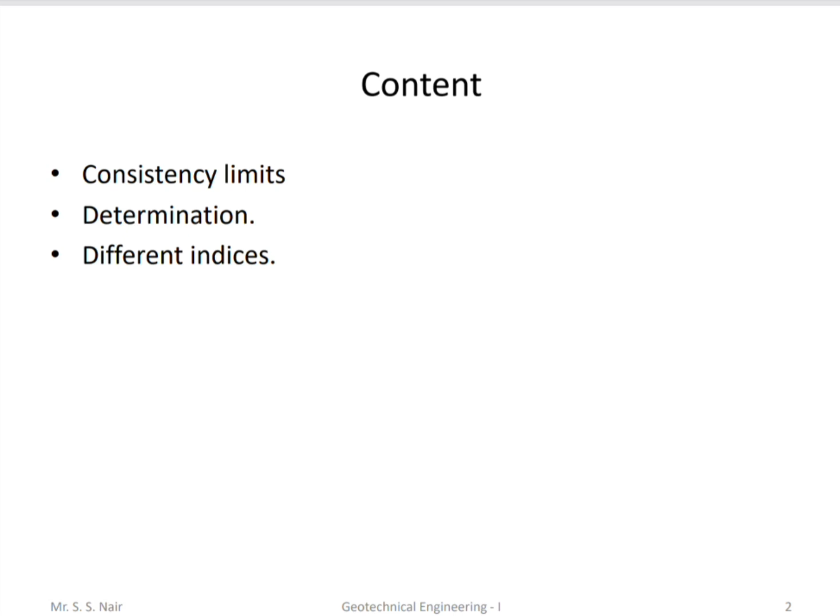Geotechnical Engineering Part 1, Soil Consistency. Today we'll be discussing consistency limit determination and different indices.

Consistency is a term used to describe the degree of firmness of soil in a qualitative manner, using descriptions such as soft, medium, firm, stiff or hard. Generally, this degree of firmness in soil is a measure of the moisture content in the soil. It is the relative ease with which a soil can be deformed. The property of consistency is associated only with fine-grained soil.

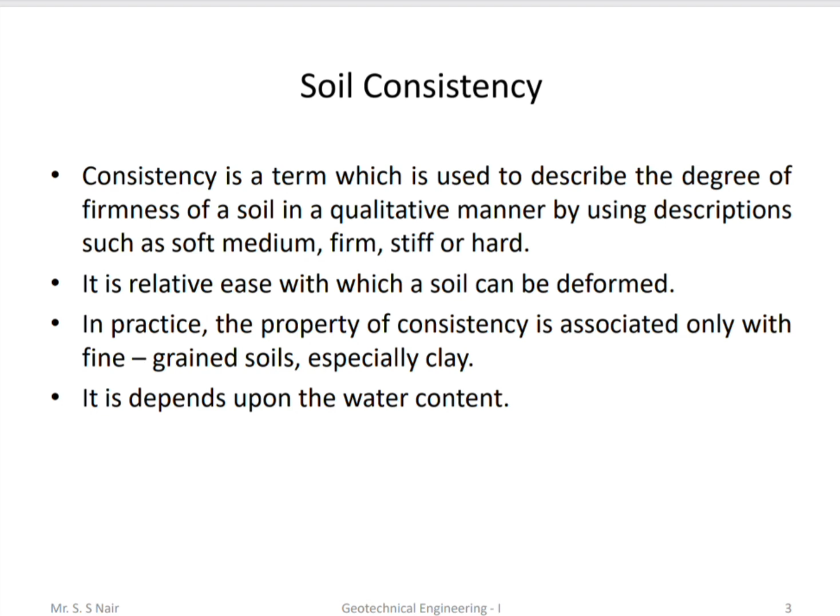Soil consistency directly depends upon moisture content, and this degree of firmness depends upon water content. As shown in the graph, while increasing the water content, the soil transitions from solid state to semi-solid state, then semi-solid to plastic state, and plastic state to liquid state. This water content also denotes the consistency limits.

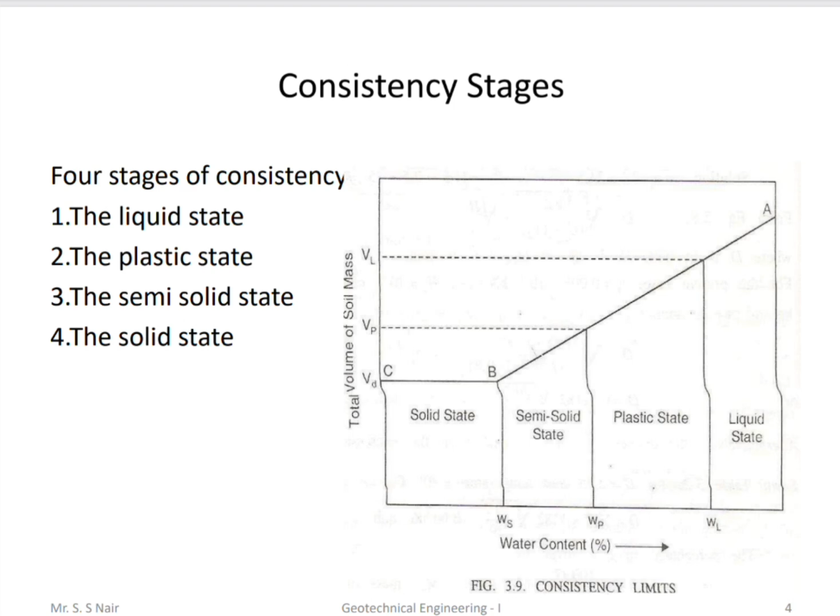Let us understand the three stages: liquid stage, plastic stage, and shrinkage stage. When fine particles are mixed thoroughly with a large quantity of water, the resulting suspension is in a liquid state with no resistance to flow. In this stage, no shear strength will be available.

The second is the plastic stage. The water content of the suspension is gradually reduced to keep the consistency of the sample uniform. A stage comes when it just starts offering resistance to flow - the soil resists the flow of the amount of water added. This is the plastic stage, where a small amount of shear strength will be available.

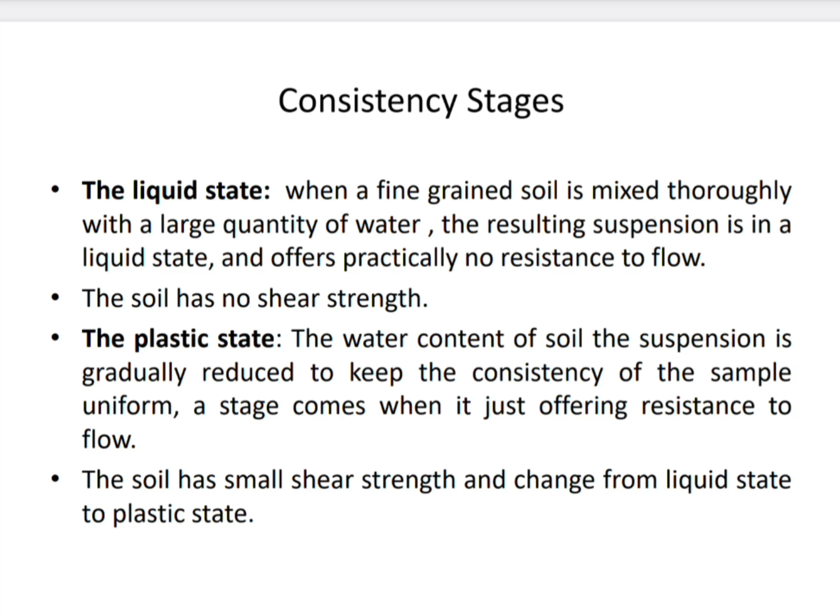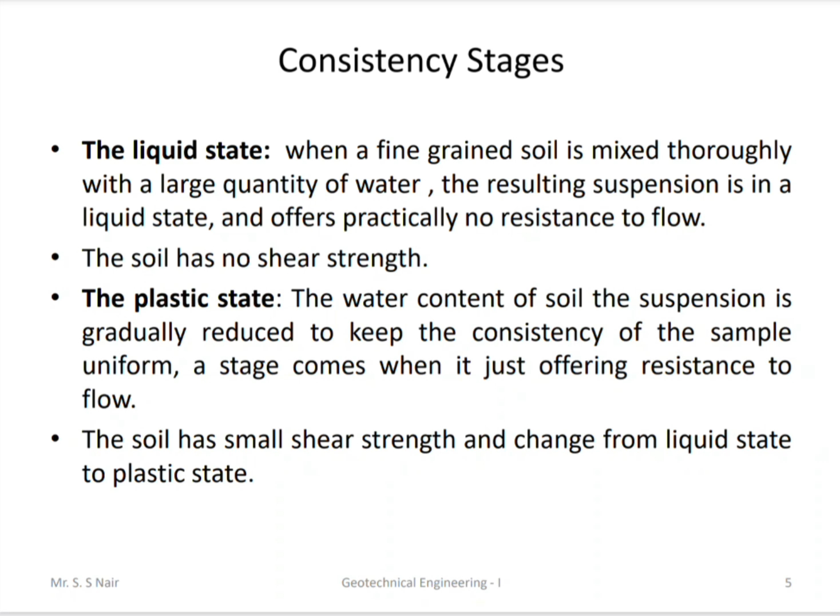The third one is the shrinkage stage, where a lesser amount of water is added. In this stage, a small amount of shear strength will be available.

Now let us talk about the Atterberg limits. The first is liquid limit: the water content in percentage at the point of transition from plastic to liquid stage. This transition from plastic to liquid stage is said to be the liquid limit, where soil behaves as a liquid material.

In plastic limit, it is the percentage water content at the point of transition from semi-solid to plastic stage, where the soil behaves as a plastic material. Now in shrinkage limit, it is the water content in percentage at the point of transition from solid to semi-solid - the moisture content at which no further volume change occurs with further reduction in moisture content.

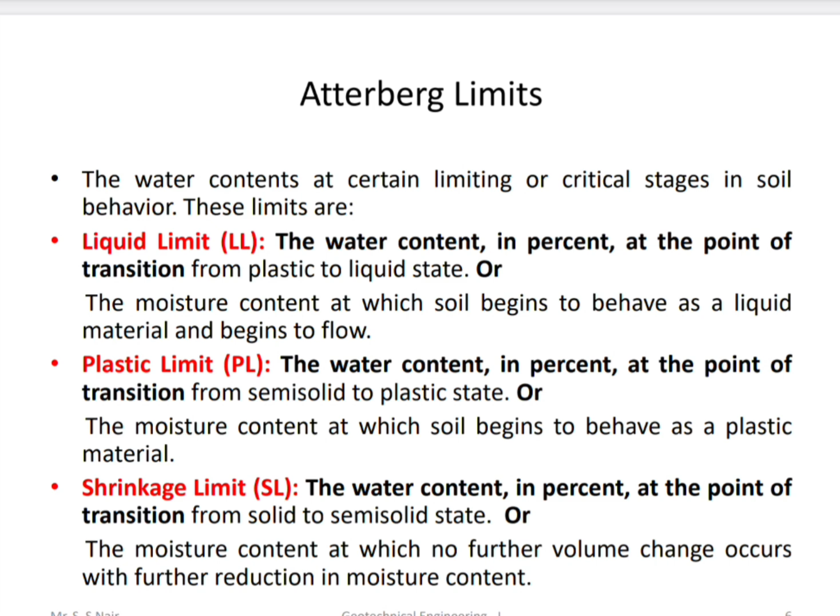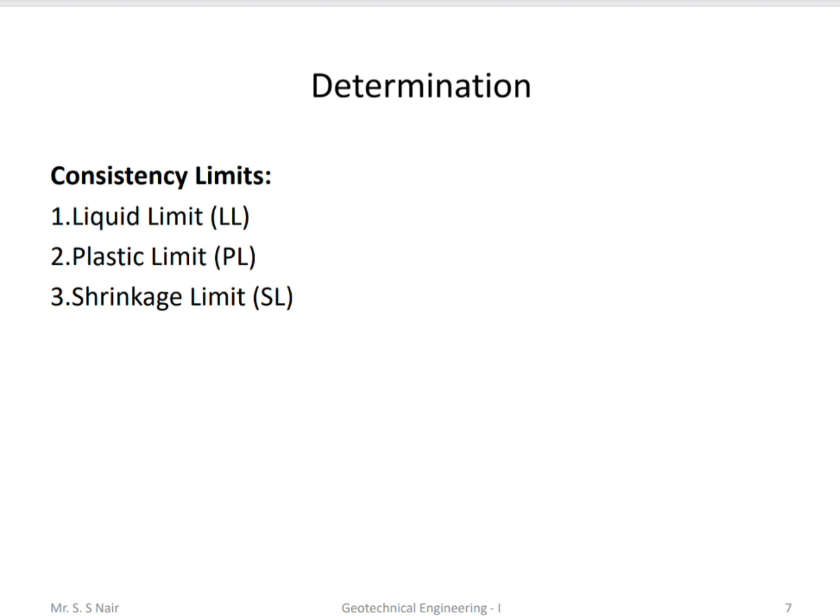So how do we determine the liquid limit, plastic limit, and shrinkage limit? Let us discuss the liquid limit first. What are the needs of the liquid limit? Generally, liquid limit is significant to know the stress history and general properties of soil as it relates to construction. From the results of liquid limit, the compression index may be estimated, which helps in settlement analysis.

If the natural moisture content of the soil is close to the liquid limit, the soil can be considered soft. If the moisture content is less than the liquid limit, the soil is brittle and stiffer. So more water content means more liquid limit, more soft stage. Less liquid limit means the soil may be brittle or stiffer, and lesser water content may indicate a hardened state.

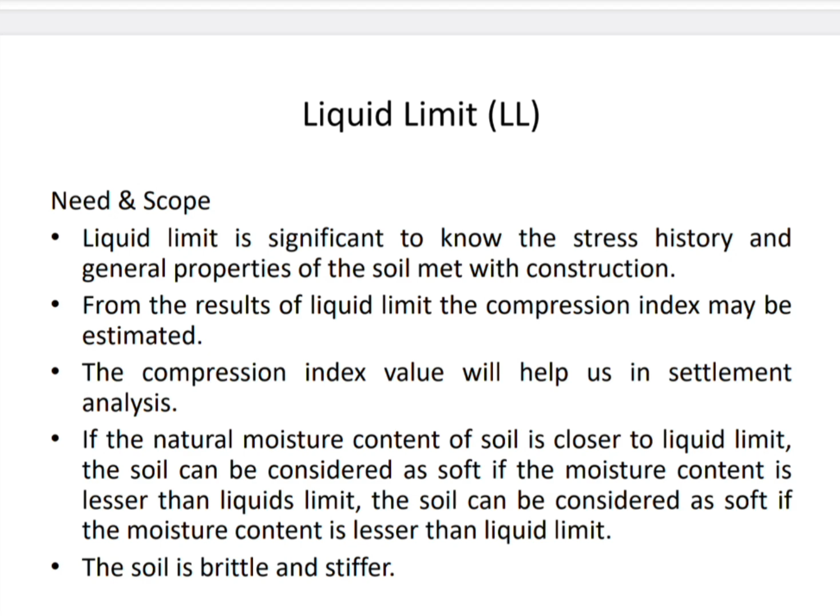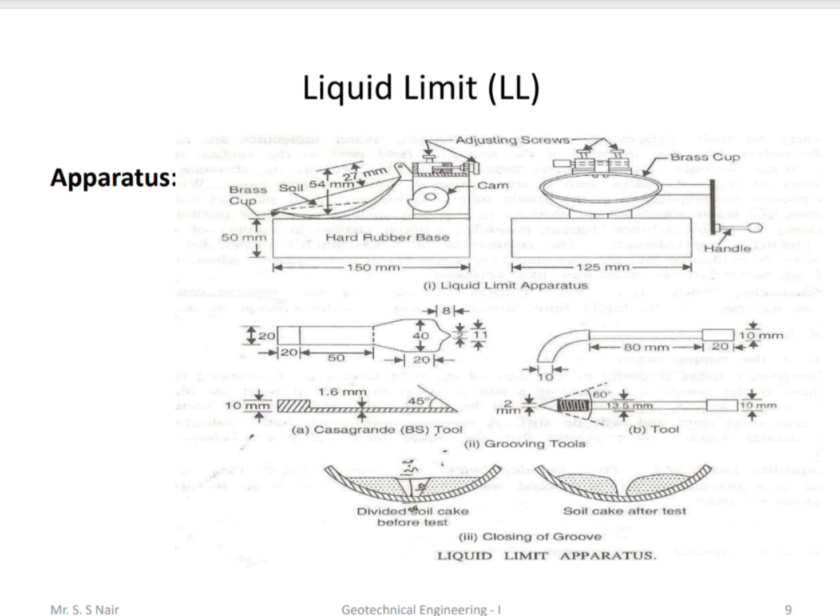Casagrande apparatus is used to determine the liquid limit. Here you can see a cup is placed on the base, with handles to give the number of blows to the cup, and a spatula to cut the sample in the cup, used to determine the liquid limit.

150 grams of dry soil is taken and sieved through the 40 number sieve. Add 20% water. Then the Casagrande apparatus is placed, and the sample is placed on it, cutting a groove of 2 mm at the base.

Now the number of blows is counted by running the device, until the groove in the soil closes to a distance of 12.7 mm. Take the sample and find the moisture content. This test is repeated 3 times - we need the moisture content and number of blows.

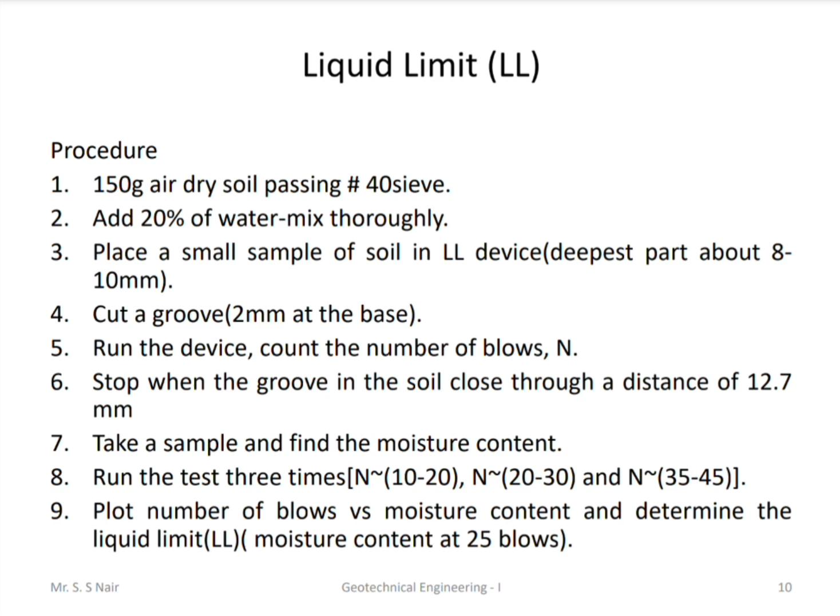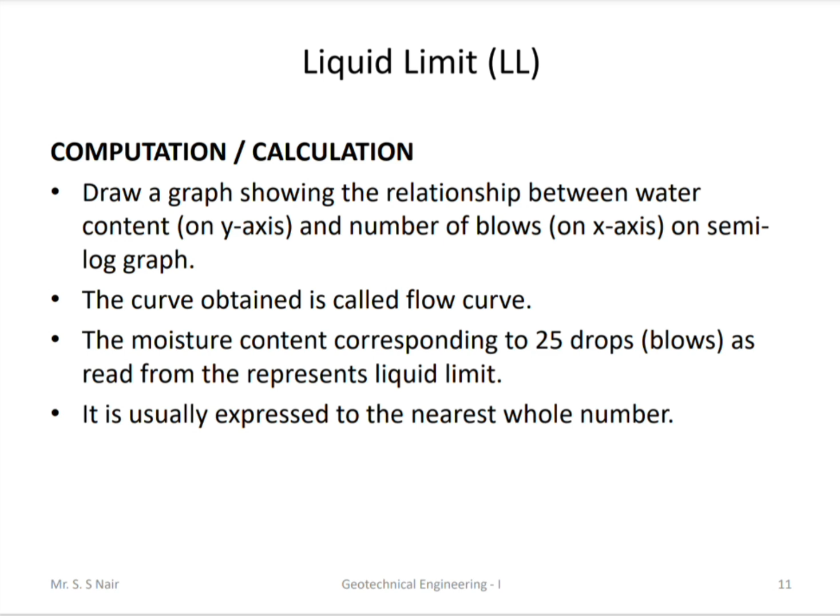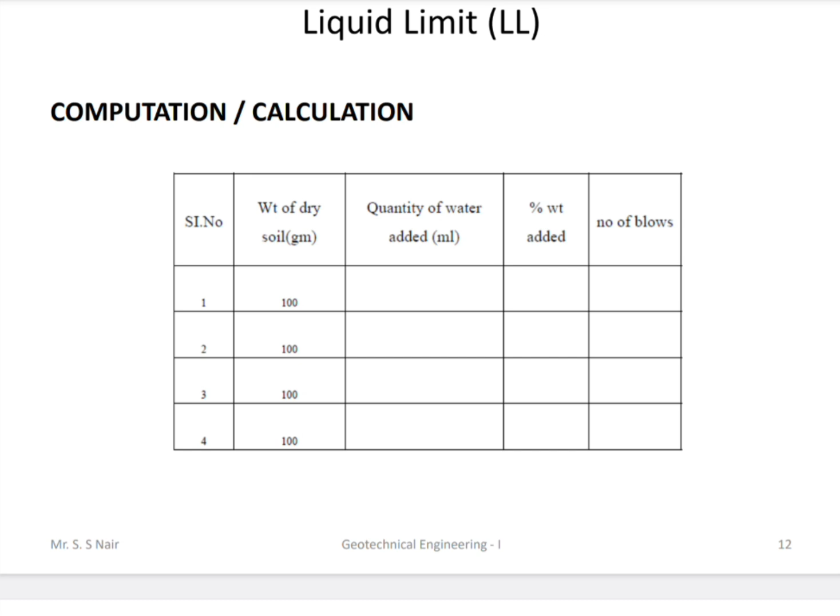Now for 25 blows, determine the moisture content - this moisture content gives you the liquid limit. A graph between water content and number of blows determines the liquid limit; the curve obtained is the flow curve, and the water content at 25 blows is noted. This will be the liquid limit. Here you can see the calculation of quantity of water and number of blows - the flow curve for 25 blows gives the liquid limit.

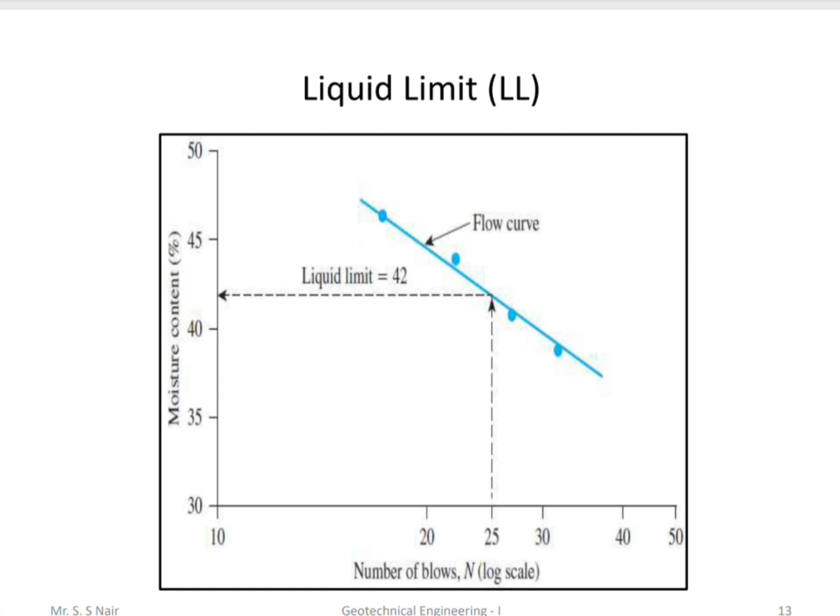Now for the plastic limit test - generally to measure plasticity, soil is used to make bricks, tiles, and soil cement blocks. So we need to determine the plastic limit.

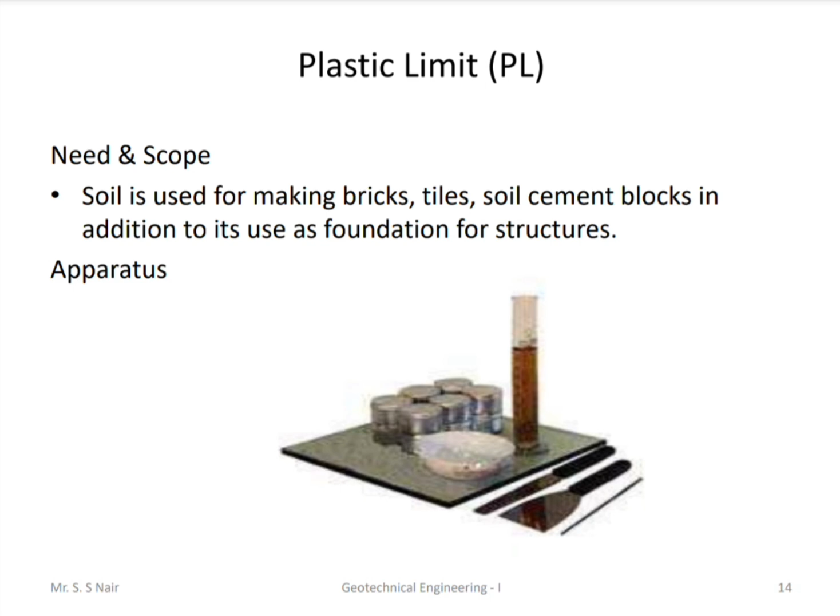Here also, 20 grams of soil is taken and sieved through the 40 number sieve. Add water and mix thoroughly. Prepare several ellipse-shaped soil masses by squeezing the soil with your hand. Put the soil in a rolling device, and roll the soil until the thread reaches 3.2 mm. Continue rolling until the thread crumbles into several pieces, then determine the moisture content.

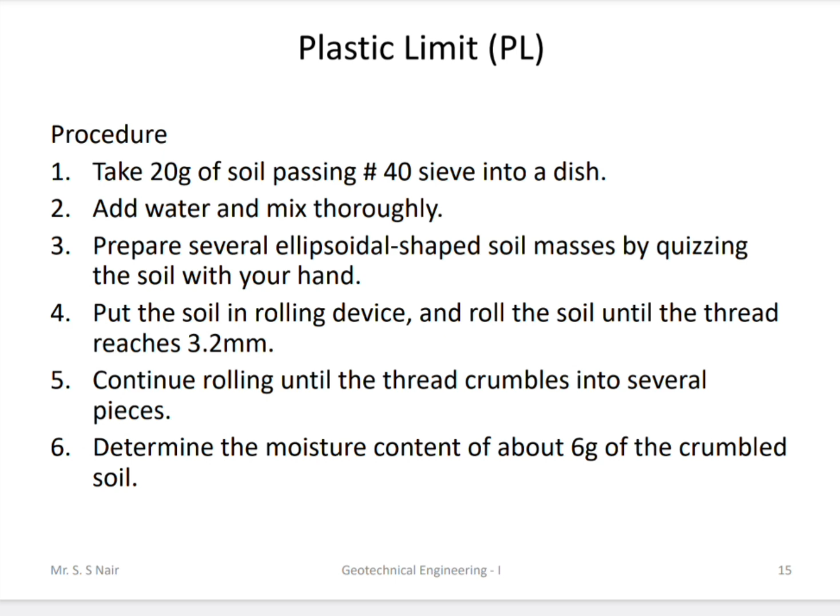Here you can see small ball shaped sample is being prepared, then thread of 3.2 mm.

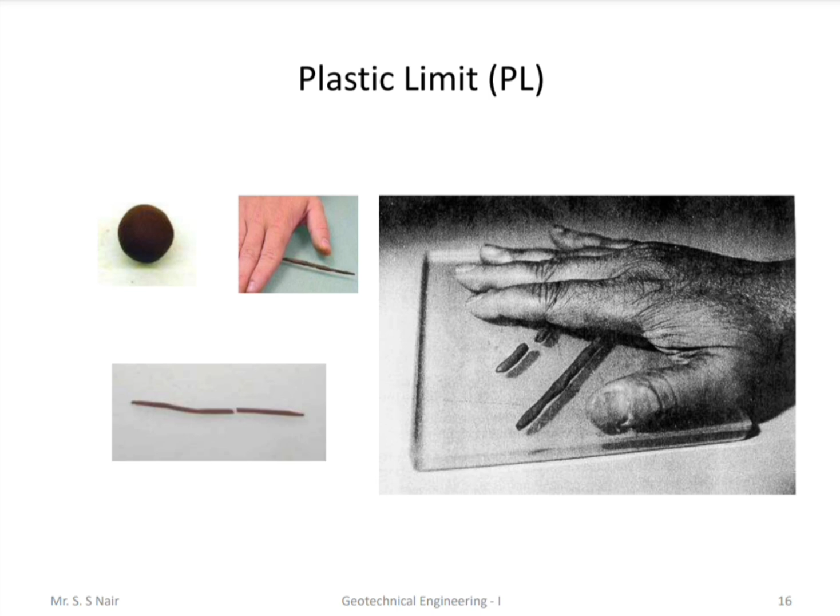Then this sample is kept in the oven to determine the moisture content. Observation, reading: dry soil weight, empty container weight, wet soil weight, again drying weight of soil, determining the water content.

Now what is plasticity index? Liquid limit minus plastic limit gives you the plasticity index. So after performing the liquid limit, plastic limit is performed, and then plasticity index is noted.

A value of 0 indicates no plasticity, less than 7 indicates low plasticity, 7 to 17 indicates medium plasticity, and greater than 17 indicates high plasticity. So this table shows the value of plasticity.

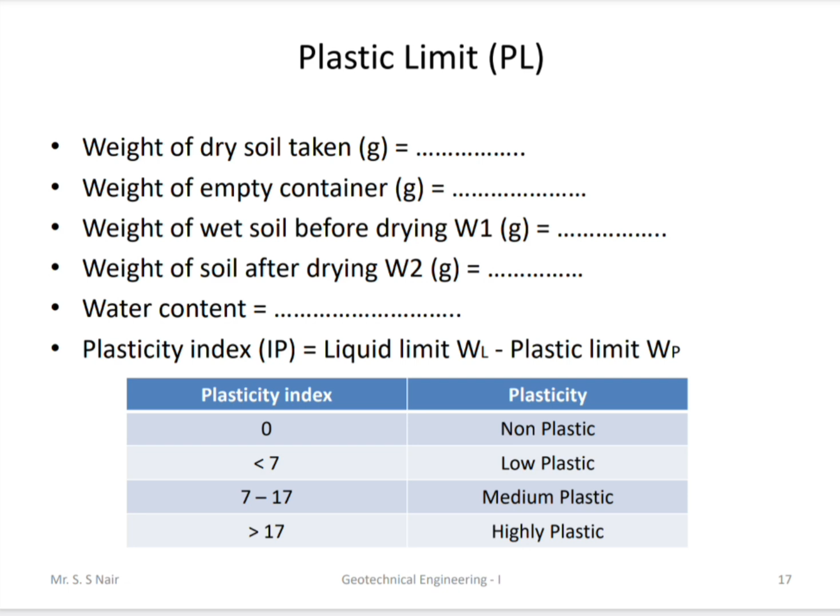Shrinkage limit: to determine the shrinkage limit, calculate the shrinkage ratio for a given soil. So here as soil loses moisture, either in its natural environment or by artificial means in laboratory, changes from liquid stage to plastic stage, or from plastic to semi-solid stage, and then to solid stage.

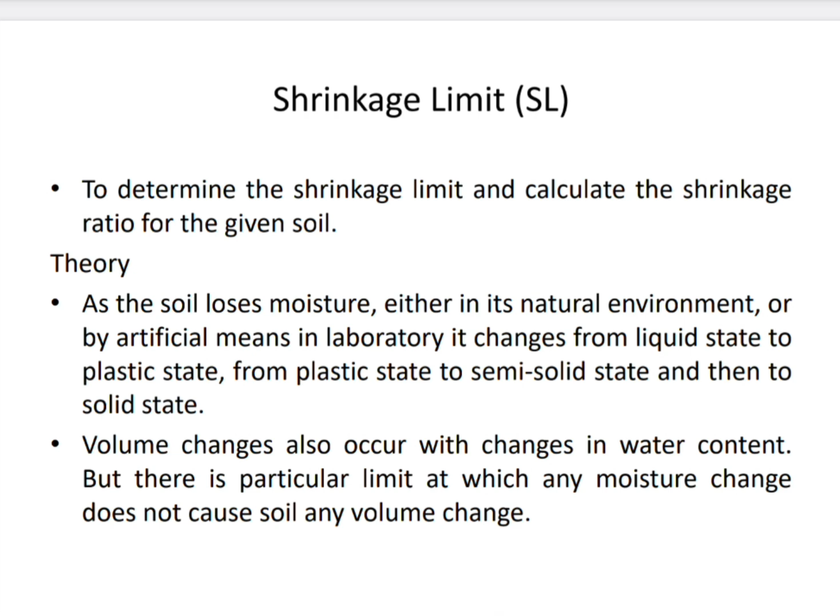So this volume change occurs with change in the water content. But this is a particular limit at which any moisture change does not cause volume change. So this volume change we need to find, that is shrinkage limit.

So soil undergoing large volume changes with change in the water content may be troublesome. So volume change may not be equal.

Shrinkage limit test should be performed on a soil to obtain a quantitative indication of how much change in the moisture can cause or occur before any appreciable volume change occurs. So this indicates the change in volume.

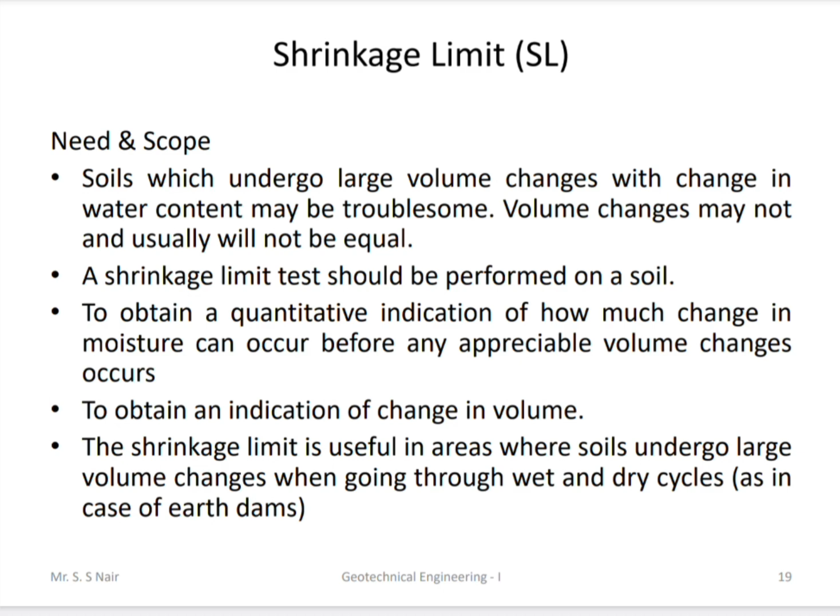The shrinkage limit is useful in the area where soil undergoes large volume change, then going through the wetting drying cycle, generally in the earthen dam.

Here you can see the apparatus of shrinkage limit determination: evaporating dish where mercury is being filled, and dry soil pat is kept in a container where mercury is being displaced.

So you can see the before shrinkage shape of the wet soil and after shrinkage dry soil, the volume change from the figure.

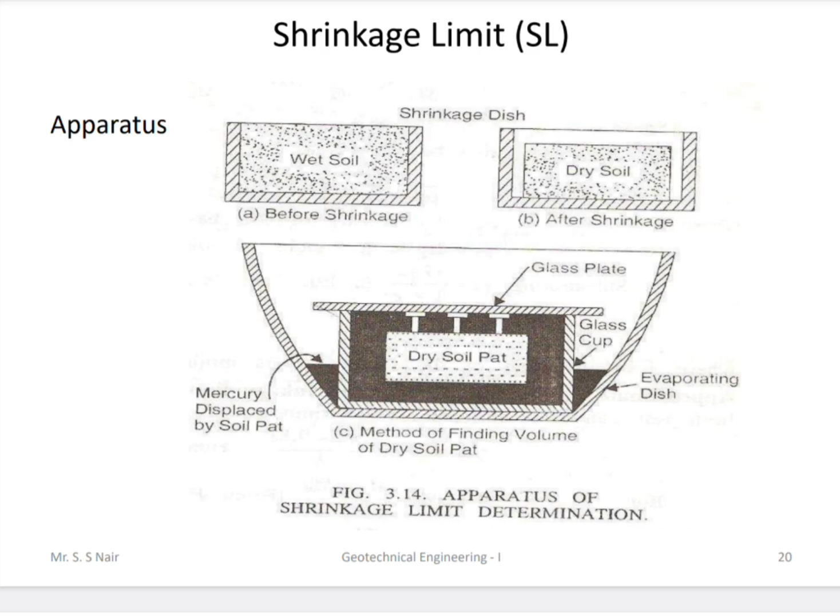Now here 50 gram of soil passing through 425 micron sieve, using distilled water, make a creamy paste. Required mix water content is somewhat greater than the liquid limit.

Coat a thin layer of Vaseline inside a shrinkage dish and weigh. Fill the dish in 3 layers of soil paste. The last layer should stand above the rim.

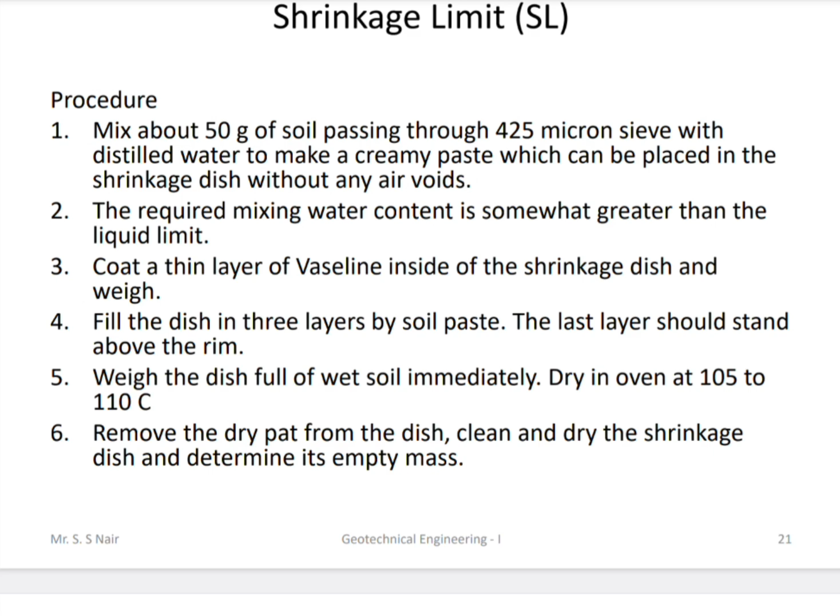Weigh the dish full of wet soil immediately. Dry in an oven of 105 to 110 degrees Celsius temperature. Remove the dry pat from the dish, clean and dry the shrinkage dish and determine its empty mass.

Weigh the empty mercury weighing dish also. Keep the shrinkage dish in a large porcelain dish. Fill it to overflowing with mercury. Transfer the content of the shrinkage dish to the mercury weighing dish.

Place the glass cup in a large dish, fill it overflowing with the mercury, and remove the excess by pressing the glass plate.

Place the dry pat on the surface of mercury and submerge it. Transfer the mercury displaced by the dry pat to the mercury weighing dish and weigh it. This mercury transfer to the container will give you the weight of displaced mercury.

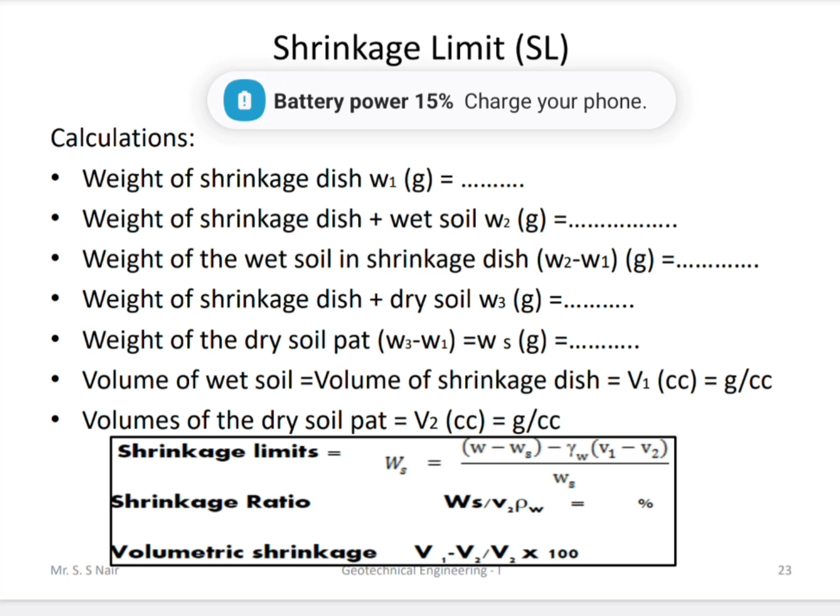So in the calculation, first of all, weight of shrinkage dish is W1. This shrinkage dish containing wet soil is W2. Now weight of wet soil in shrinkage dish is W2 minus W1. Now weight of shrinkage dish plus dry soil is W3, and weight of dry soil pat is W3 minus W1.

Now we need to get the volume of wet soil, that is volume of shrinkage dish, V1, and volume of dry soil pat, V2.

Using the shrinkage limit formula, we'll be getting Ws, and finally we'll be using it to find the shrinkage ratio, that is Ws divided by V2 times density of water. And finally volume change we can find out using V1 minus V2 divided by V2 into 100.